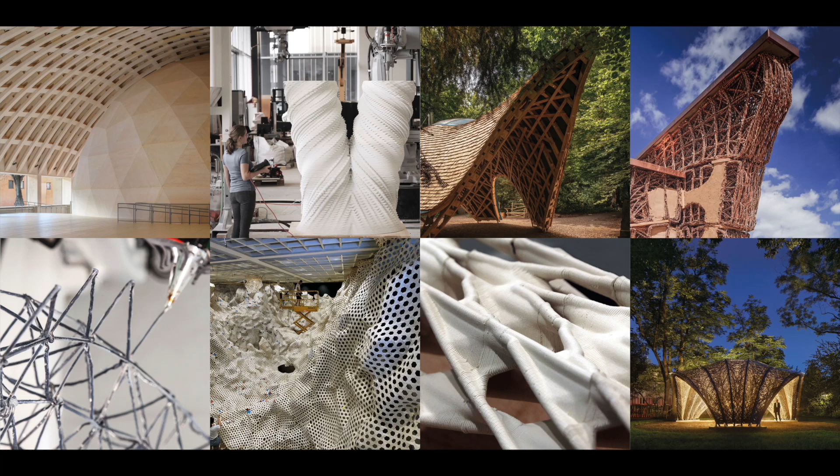Thank you. We're into the final session of a wonderful 2 days. I'll be back a bit later on, maybe to share very briefly a few thoughts on what's been a really provocative event. My job right now is simply to introduce Kathrin Dörfler, who will be leading this final session for us, and she'll be starting out with an opening statement to put it into context for all of you.

Just to put who Kathrin is into some context, there's a wonderful connection between Kathrin's career and FABRICATE, if I might borrow that kind of relationship a bit for a moment. She's an architect, researcher, and educator in computational design and robotic fabrication, and her academic career got going in the early part of the 21st century.

So in around 2004, I believe, she started at the Angewandte in Vienna, went to the Technical University, so that shift from the avant-garde to the technical in that cauldron in Central Europe of industry and arts and human endeavor. I think there's an incredibly strong culture that we can talk about in terms of where people are coming from. So there were some wonderful words today about the centers of excellence and learning that are represented in this space today. And also for those that are not here, it's incredibly important to recognize.

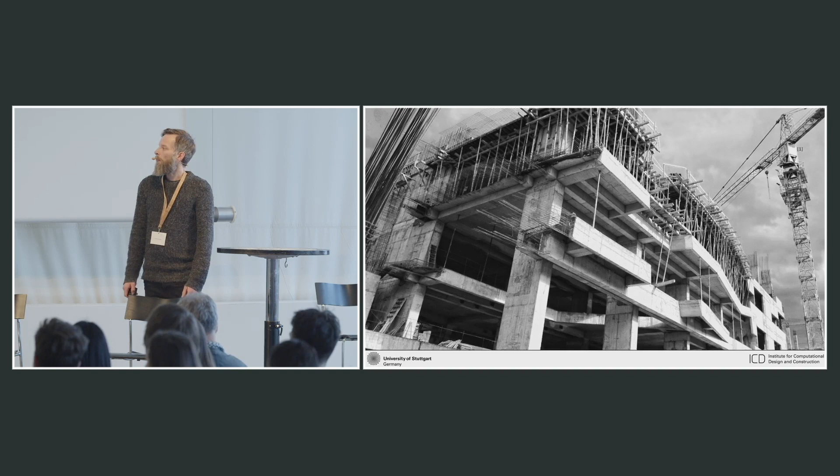It was designed by ICD and ITKE at the University of Stuttgart together with a team of ITech master students. Many of them are here today also, which I think is fantastic. And it was produced and assembled by the industry partner of the project, FibR. So before I get into the component development, I think it's good to give a bit of a background to see why we're even attempting to make building components with fibers.

So if we look at the bigger picture in the construction industry today, then we can see that there has been a lot of digital progression recently. However, the construction industry is slower to adopt this digital innovation. However, it would be important because there's a significant global requirement for additional floor space that we will have to build over the next years, and we've discussed this before also yesterday. So that's going to be a challenge to achieve and will require additional effectivity in construction. And on top of that, there is, of course, the climate crisis, to which construction is also significantly contributing with about 37% of global energy and process emissions coming from the construction sector.

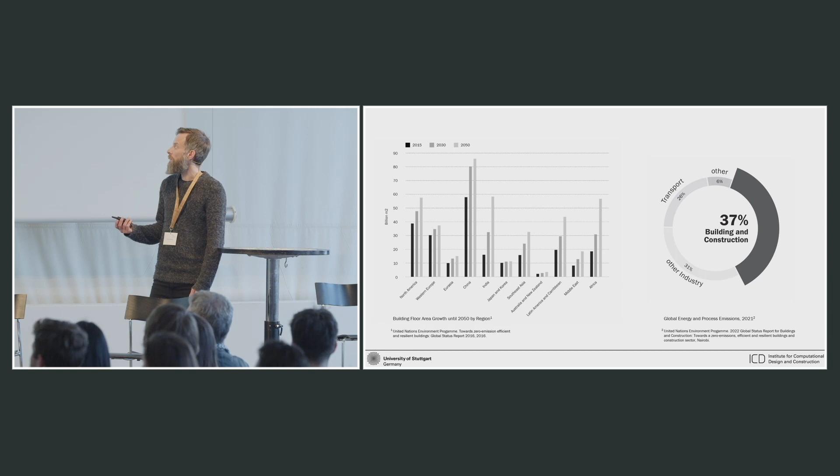So I think the question that we should ask ourselves as architects is, what can we do differently? How can we build differently? How can we be more effective and at the same time more sustainable? And for this problem, we can find a lot of inspiration in natural systems. So if we look at how nature works, then we can see that we have a very high degree of integration of form, material, and structure. And nature achieves material savings through differentiation and geometric complexity. And if we look at the current state in the construction industry, that is a very big contrast to that, because we're mostly prioritizing uniform building components to mass produce them, right?

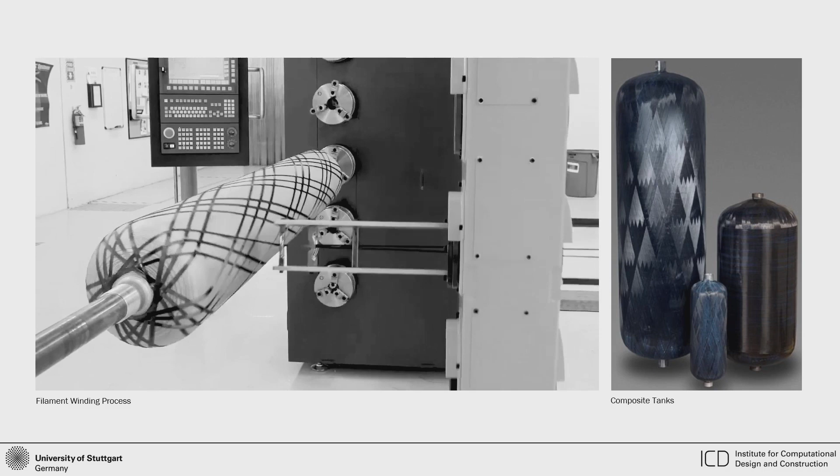And this principle of integration does not only apply to natural systems, but we can also transform that to technical fiber assemblies. And leveraging this potential is strongly tied to the way how we fabricate these assemblies. And a very interesting technique from the industry is filament winding. So basically here, resin-impregnated fibers are deposited on a mandrel in different pattern formations. And by changing this pattern, we can customize the performance, and we can tailor the material placement to our needs. And that's also very interesting for building components.

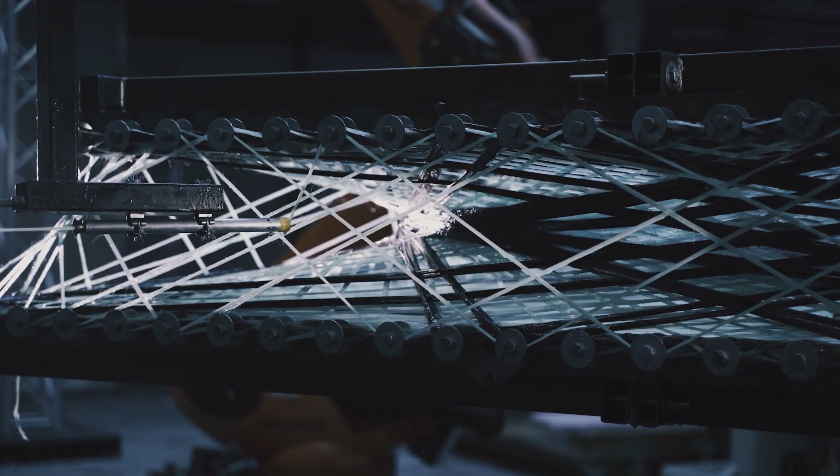And based on this principle, ICD and ITKE developed coreless filament winding throughout the last decade. So basically that enables the production of morphologically differentiated building parts with minimal formwork. Here we have resin-impregnated fibers that are deposited around anchor points on winding frames to create highly customizable and multi-layered fiber components. And the shape of the composite is established by the interaction of the fibers. And this enabled the production of a series of demonstrator projects throughout the last years. They demonstrate how we can create lightweight, highly performative composite components.

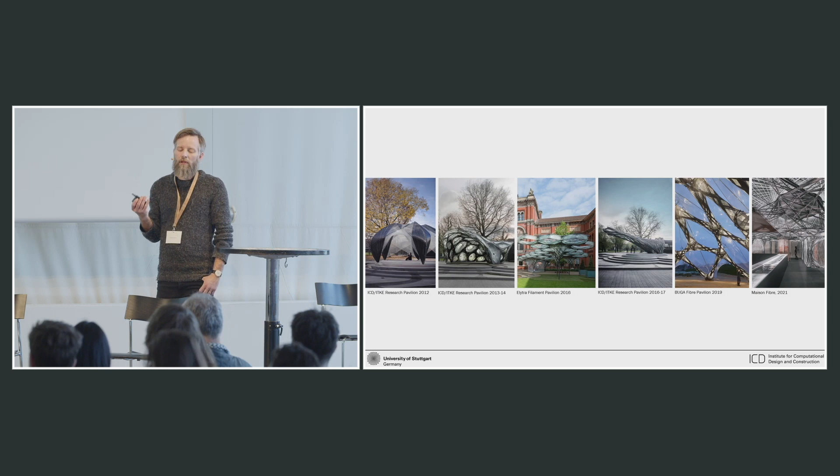However, if you look at the material system, they use carbon and glass fibers. And these materials are based on non-renewable material sources, and they have rather high global warming potential and embodied energy. But we can improve on that. We can change this material and use plant fibers instead. So if we look at flax fibers, they have high stiffness and strength values, and they can be locally grown in Central Europe, and they don't depend on non-renewable energy in the production, so they don't depend on petrochemical sources.

Yeah, that's the base material. So the raw material consists of fiber filaments, either parallel or slightly twisted, and they are impregnated with a resin matrix that acts as a binder. And these fiber bundles are anisotropic, so that means the longitudinal direction has a much higher stiffness than the transversal one. And that's an important precondition for our fiber formations, because we can leverage this fact.

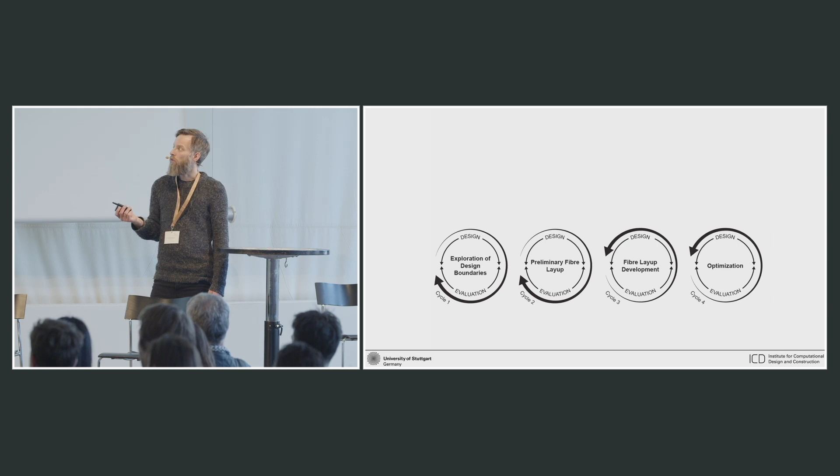So we can tailor the composite and the stiffness and the strength to the direction and the magnitude of the loads that we have in our structures. And to leverage this potential of anisotropic fiber formations, we developed a feedback-based co-design workflow that is represented as 4 iterative cycles. It relies on concurrent information exchange, and it allows for the co-evolution of computational design, structural engineering, and robotic fabrication.

And the use of plant fibers now adds additional complexities to this process, because the fibers have higher variabilities in their mechanical properties, and we need to account for that also in the design process. So basically, all those development cycles need to be extended. So the material system has a significant influence on the design boundaries. It impacts component dimensions, span, connection amount, connection type. And the characterization of the material becomes really important.

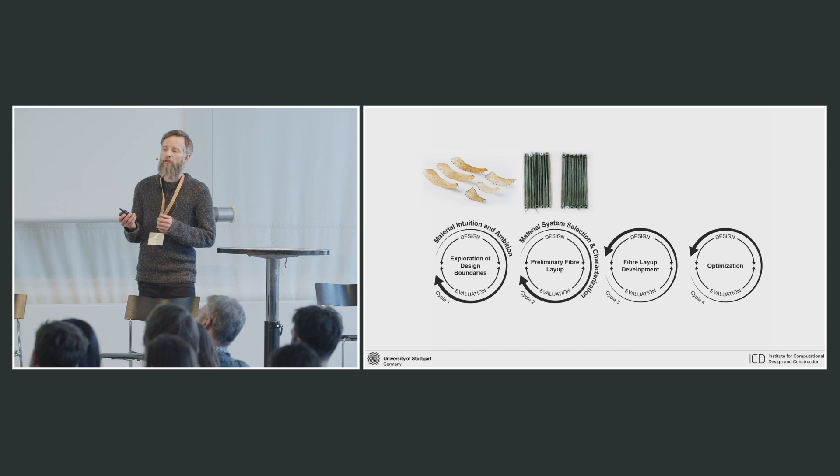So here we use small-scale specimens to determine the actual mechanical properties that we can get out of these material systems with our fabrication system. In the next step, this has to be evaluated, basically the scalability of those small-scale investigations at a full scale through full-scale prototyping, which is very important for the fiber layup development. And ultimately, we want to optimize our fiber patterns to make sure we use our material system to its maximum capacity, so we find the boundaries of this material system.

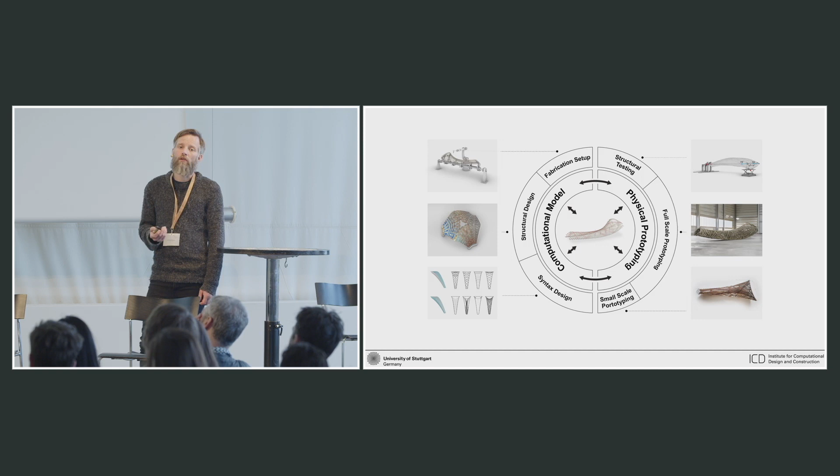Throughout the component development, our computational models are continuously informed and calibrated by real-world feedback that we derive from small-scale prototyping, full-scale prototyping, and subsequent structural testing. Especially prototyping at the full scale is important, because it gives us feedback on the manufacturing feasibility, structural integrity, and also the design quality. And the subsequent structural testing allows us to calibrate digital models and to determine safety factors for all of our fiber patterns.

The development of the component started with the exploration of the design boundaries. So here the material capacity was estimated in preliminary structural investigations and models to allow for a maximum of 5 meter span. So that led these initial investigations on the component morphologies that we can see here. And we ended up with a global design of 15 components that are radially arranged in three groups of 5 component types each.

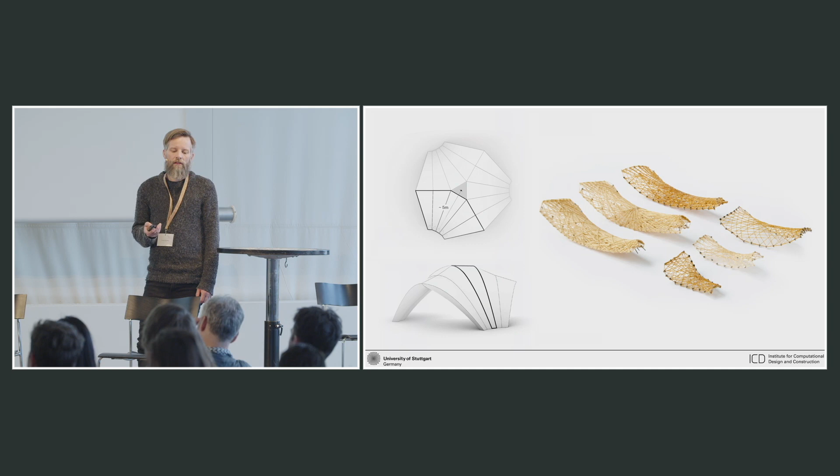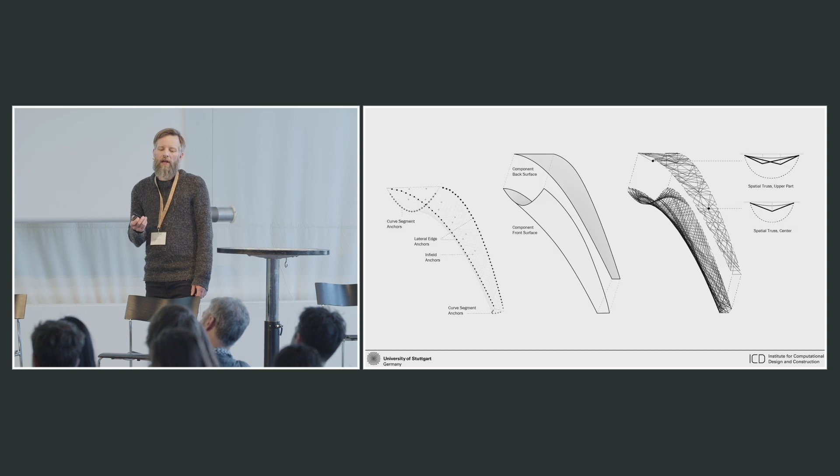And the center is closed with a triangular keystone element, and then we have a polycarbonate skin to cover the structure and to shelter the interior and also protect the natural fiber components. The final anchor point configuration looks like this. So basically we have 2 curved segments and lateral edge anchors that define the component. So the component can be divided into 2 surfaces. We have a front and a back surface. And the front surface is conceived as a lattice-like layer, and the back part of the component is composed of multiple truss-like layers, and it supports the polycarbonate skin.

Each fiber component is about 5 meters long. And here we can see the individual layers that make up the 2 surfaces. So we see the back surface that's composed of multiple truss layers and then additional bracing layers to push fibers together to improve fiber interaction. And this back part receives and distributes the snow and wind forces that act on this polycarbonate skin.

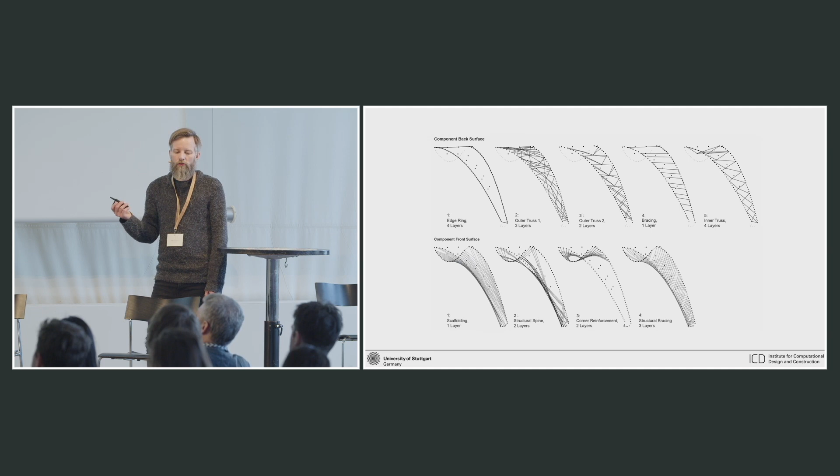And the front surface makes use of the high surface curvature that we have in this part for increased fiber interaction of these long spanning fibers. It's a combination of scaffolding with a longitudinal structural spine and additional corner reinforcement to add additional stiffness and to make sure that we reduce the buckling length. And together, those 2 surfaces form a closed hollow section, and that increases geometrical stiffness.

So to understand the material, we started material characterization based on what we knew. So we used carbon fibers and petrochemical epoxy and compared it to different flax fiber combinations. So we had flax fibers and petrochemical epoxy and flax fibers and partially bio-based epoxy. And what we saw is that the performance of the carbon fibers is, of course, the highest. With the flax fiber combinations, we reached, in compression, roughly half of that.

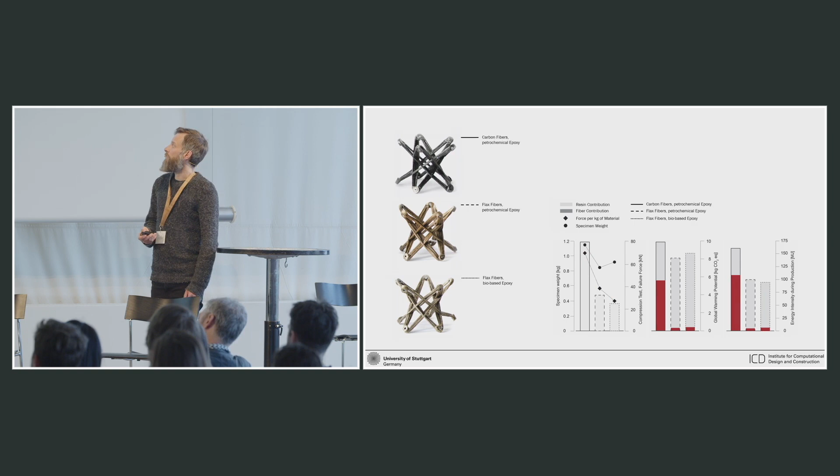And we also saw that if you look at sustainability markers like global warming potential and energy intensity, if we use plant fibers, the fiber contribution is drastically reduced. However, the resin contribution is still pretty high. We can reduce that by about 20% if we use partially bio-based epoxy. However, given the tight time frame of the project, we decided for a combination of flax fibers and conventional petrochemical epoxy. And with the material system in place, the first full-scale prototype could be built.

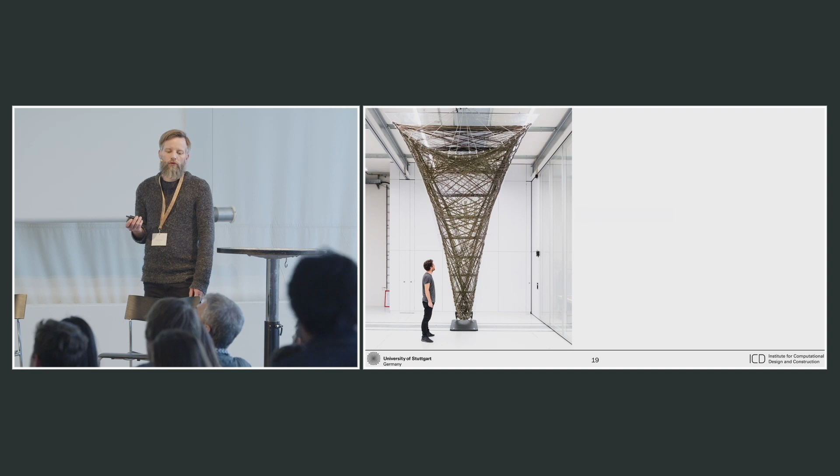This was done by the students and aimed to evaluate the scalability of the initial material characterization and the preliminary fiber layup. This was as such very successful. However, it showed inconsistent material impregnation, which was because of the fiber product. So we used a fiber roving with a small twist that was pretty hard to impregnate. So we changed that to a flat roving that was easier in terms of impregnation. Again, we had to recharacterize the material, this time using a simpler specimen, just a loop that was investigated in tension and compression. And this then showed improved impregnation, and we could continue.

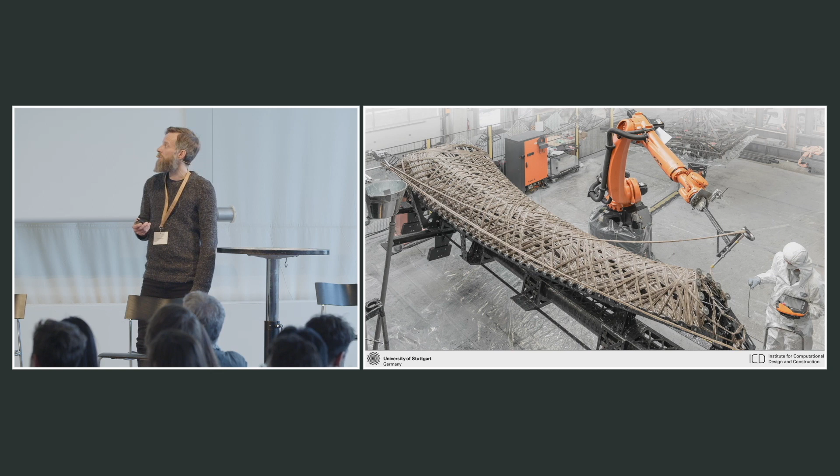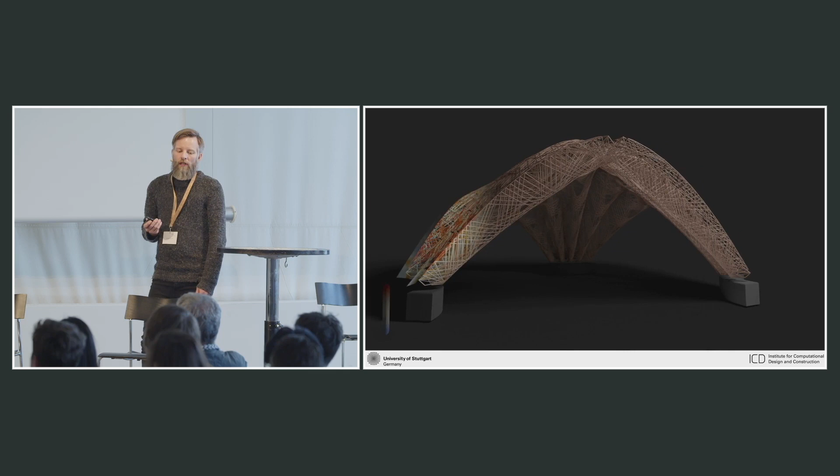So this is the actual fabrication at the industry partner's premises, where we started to produce pre-series components. In total, we made 3 of them. They were destructively tested, which is important to verify the material system at a full scale. And the FE model of this test setup is then used as a calibration tool to compare physical and digital performance. The results are then integrated into a comprehensive digital model that basically acts as a point of confluence and contains data and information from different domains like design, engineering, and manufacturing.

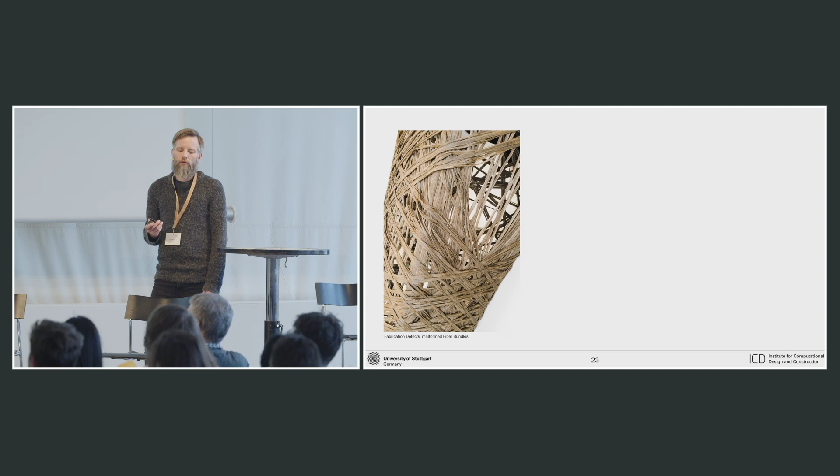And based on these pre-series components, we could identify further issues. So we again had lower than expected performance in the tests, and also fabrication issues, as you can see here, so sagging fibers that could be mitigated basically by adding a different additional material, so a sisal yarn that was embedded in the fibers to take increased tension loads during the winding.

And the lack of performance could be traced back again to impregnation issues that this time could be resolved by modifying the manufacturing equipment, so the end effector of the robot and the resin bath. And then again, we retested that, and this is a cross-section through the bundle. So here you can see that was the first iteration, and then this was the final iteration, so we have a much smoother and better impregnation.

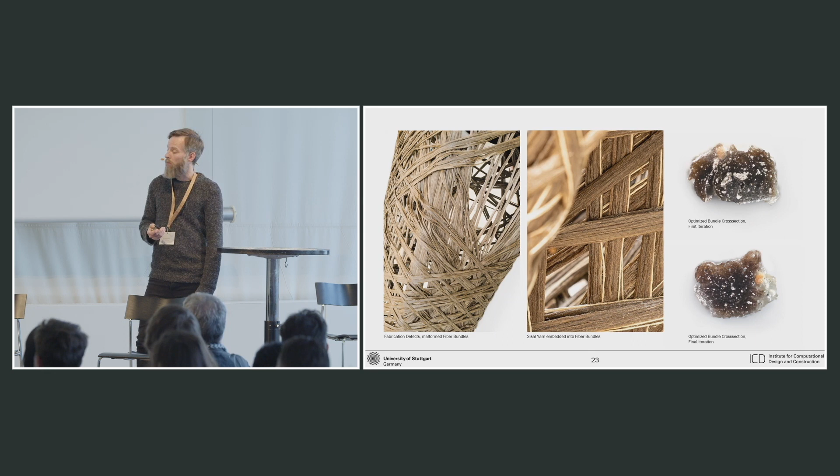With those adjustments in place, all 15 components could be successfully produced. Each of the components is about 100 kilograms. It can take compression loads of up to 40 kilonewtons. The components were then assembled. The assembly was a very fast process, so they can easily be handled by a small team with the help of a small crane. They were put in place. And that's the final result.

So the entire fiber structure is only 1.5 tons. It covers an area of 46 square meters, and it complies with the German building code and the structural requirements that go with that. That's the interior view, so we can see this kind of unique visual expression of the natural fiber composite elements.

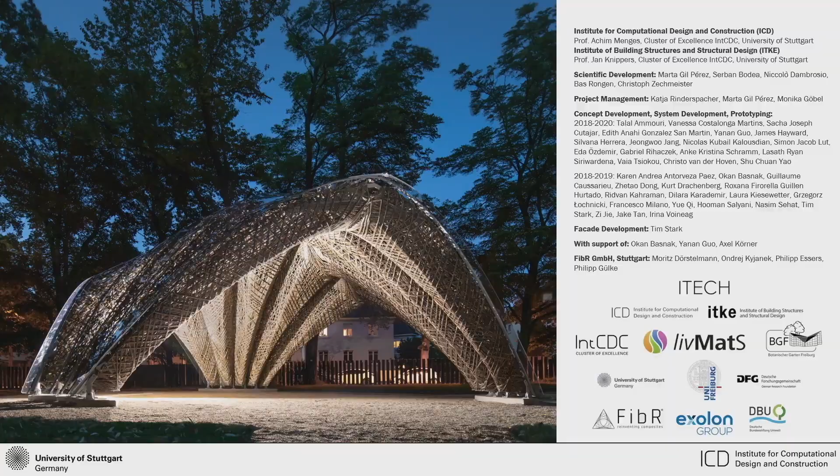Summing up, I think we saw that plant fibers can provide ecological benefits over the use of carbon and glass fiber components. However, we also saw that they add additional complexities to design, to manufacturing and evaluation, which we need to account for by flexible and interdisciplinary design workflows that allow for a material-driven development of these complex fiber patterns. And to wrap up, I want to mention two points that originated from this project that we are currently working on.

The first one is LCA indicators. So I mentioned that before. So we used the global warming potential and energy intensity to evaluate different materials, but to fully assess the component sustainability, we need to incorporate more comprehensive LCA in the design process.

And the other point is the use of the petrochemical resin, which of course was a compromise that we had to do because of the short time frame of the project. And there we are investigating both partially bio-based resin systems, but also fully bio-based resin systems to ultimately produce components that are biodegradable.

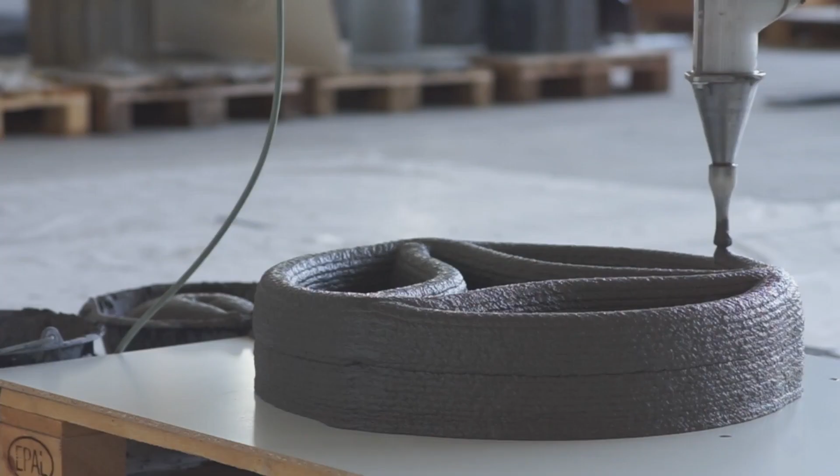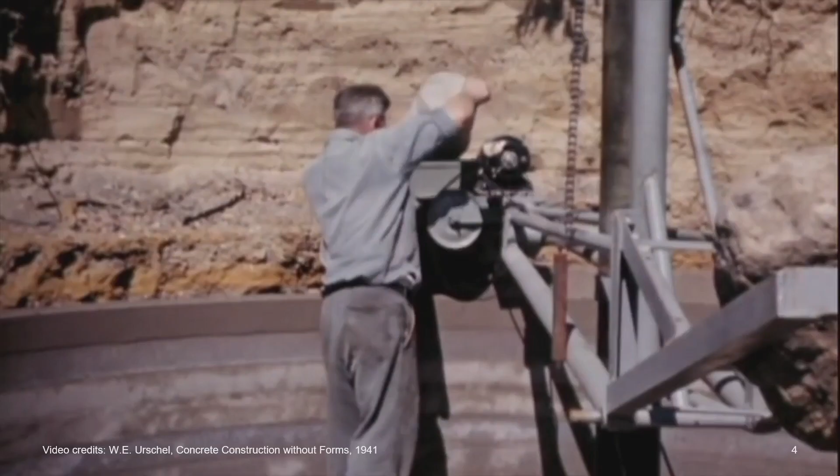Concrete is an incredibly versatile material, capable of taking any shape if poured into a formwork. The dream of building concrete structures without a formwork is not only a sustainability solution, but it is also a liberation of how we design for this material. These are the beginnings of ETH, but here are the real beginnings. Urschel patented this machine for unreinforced concrete walls in 1941. The unreinforced wall is the most direct translation of a layering process into a building component, and ironically, this remains the most common application of concrete printing in construction.

In this context, it is important to question the direction in which we steer this technology and what are the implications of digital fabrication for the construction site. And in contrast with existing architectural examples, our approach to 3D concrete printing is based on achieving structural integrity with minimal material, printing at high resolution, intricate designs, and producing components in prefabrication for modular construction with dry assembly connections.

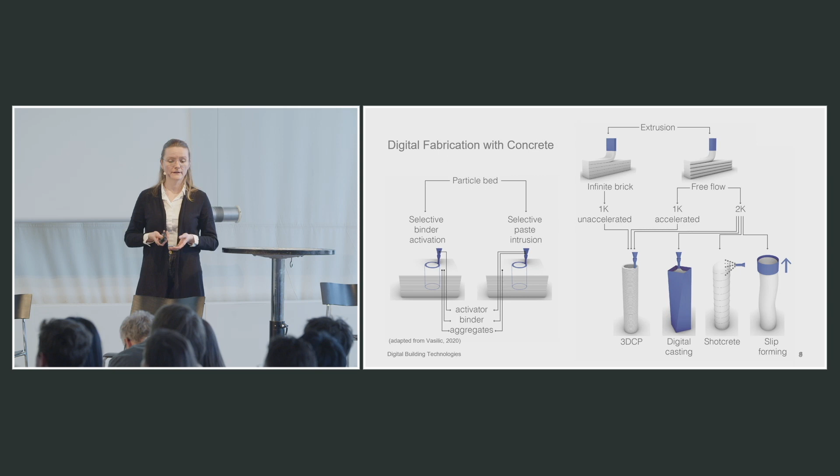This slide shows the broad scope of additive manufacturing technologies with concrete. For Tor Alva, we work with extrusion-based 3D printing, focusing on free-flow extrusion with a two-component material system. Our reinforcement strategies focus on solutions that have the most direct application in construction. We insert the main reinforcement after 3D printing, either as bonded rebar or as post-tensioning. And the scale of the secondary reinforcement is closer to that of the layer, making the two processes compatible, especially in our chosen solution of placing the shear reinforcement between the layers.

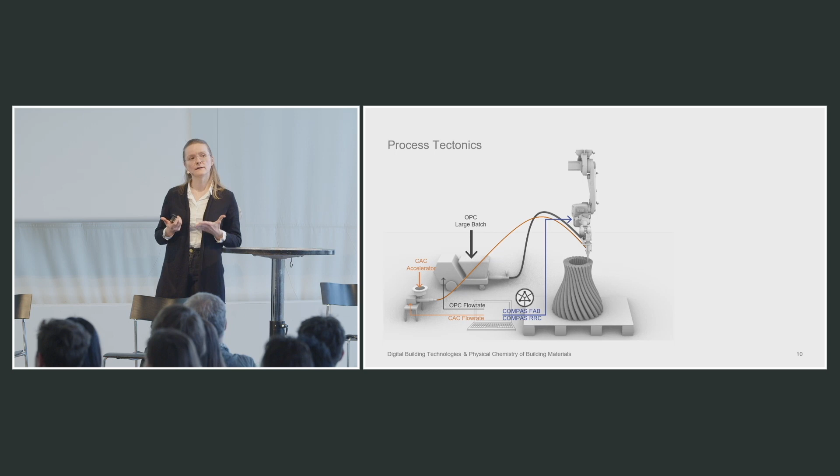The first implementation of this process is based on using a large batch of retarded Portland cement mix that is prepared in sufficient quantity for the entire print. This material is then later intermixed with the accelerator at the nozzle, and it enables a very fast vertical build-up rate, especially suited for columns.

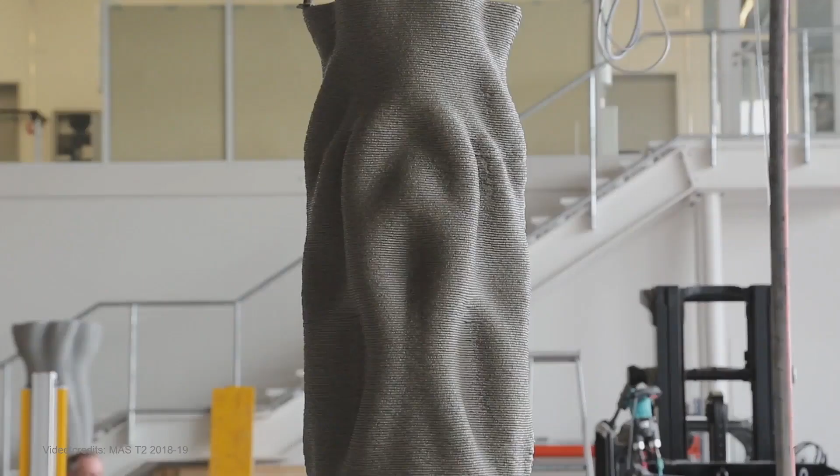This 3D printing system was tested at large scale in the first collaboration we had with Origen Foundation, where we designed and built an outdoor installation of 9 bespoke columns to set the stage for the 2019 edition of the Origen Festival of Culture. The columns share a similar typology with an outer ornamented shell and an inner vertical core. The core is reinforced with a rebar cage and cast concrete. In this round of innovation, the 3D printing was purely lost formwork.

As the collaboration with Origen Foundation expanded in scope and vision, this also led to new architectural opportunities, like the tower. This multi-story building uses the 3D printed concrete structurally and is designed to comply with the Swiss building codes. One main design requirement given by the client was that the construction should be a modular tower suitable for disassembly. Being able to produce this tower also meant adapting the fabrication setup for longer production cycles.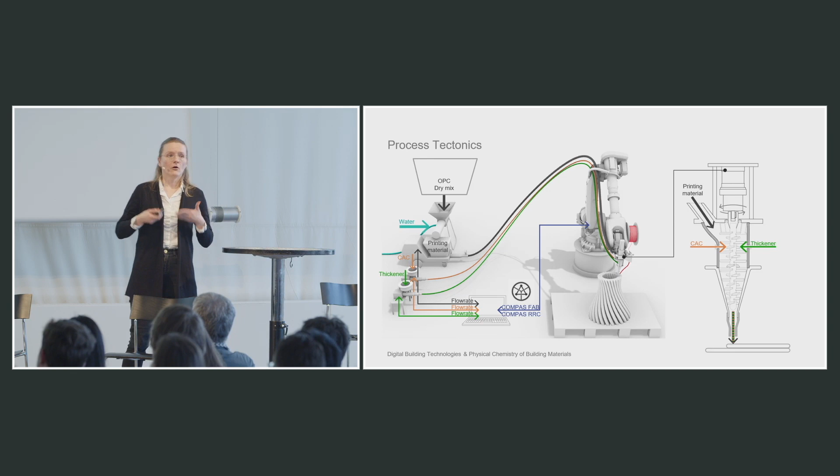We implemented a dry mixing system by preparing the material on demand, just adding water to the dry powder. Next, we also wanted a higher control of the filament properties, so we can extend the capacity of overhangs, but also really control the material-driven ornamentation.

The dry mix system was tested on the fabrication of the first demonstrator for Tor Alva, and you can see here how hollow shell elements are printed up to 2.5 meters high, and they will be assembled into a 4 meter tall structure. In this iteration, the columns are still vertical and assembled from two 3D printed components fitted with a conventional rebar cage. This time the columns are hollow.

They are transported on site and handled with regular construction equipment, where they are assembled using 4 post-tensioning rods driven through the middle of the column. For the demonstrator, the building system consists of discrete columns and slabs, where the dry connections are fitted with shear keys. Because joining 3D printed components directly is not a very aesthetic solution, we opted for treating the joint with this intermediary cast concrete to create an alternation between the components that are assembled on site. And this prototyping session helped us understand the main challenges of the project.

So we really had to think of how we can improve and go from a printed material that was not considered load-bearing to a new design. We also wanted to change the pillars from being vertical and reduce the number of post-tensioning tendons in the core. And we also wanted to have a better solution for joining the 3D printed components. The redesign introduced branching columns with a variation from 2 to 4 branches. And this V-column arrangement also increased the structural performance of the elements to resist horizontal forces better, where one of the branches acts in compression and the other one in tension.

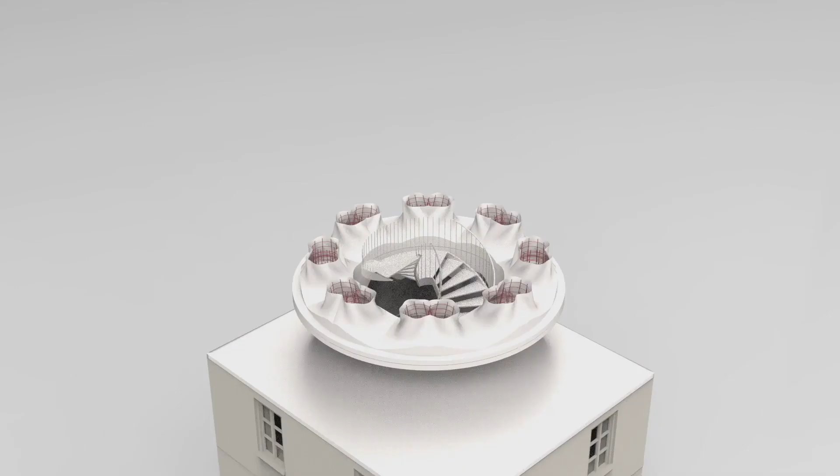As we progress, the columns gradually get slender until we reach the last level of the column under the cupola, where the performing arts space is planned. Transitioning from vertical to branching columns allowed for a rationalization of the building system into 32 self-similar components, discretized following the structural logic. The columns not only act as structural elements, but are also a central space-defining feature of the tower.

Each component is further discretized for fabrication constraints into a cast base, a Y 3D printed element of 2 meters, a continuation of the branches, and the precast capital that closes the assembly into a structurally rigid component. So far, we experienced that casting the bases poses more complexities than actually 3D printing the columns. The component is finalized after vertical rebar is placed and grouted into the hollow channels of the structure, and each branch is post-tensioned with one rod that crosses between the 2 elements. The redesign of the columns from vertical to branching also reduced the number of post-tensioning elements per branch.

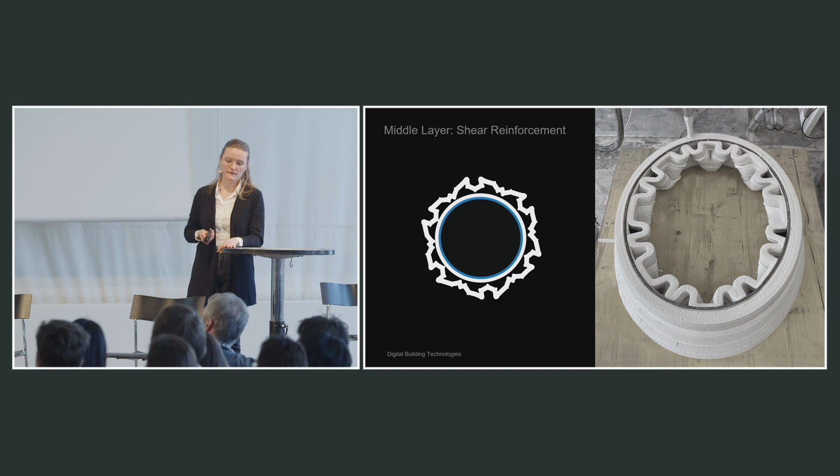Our print path rationalization is based on a 3-layer approach in which the outer layer stays visible and integrates the ornamentation. The middle layer hosts the interlayer rebar, and the inner one creates hollow channels that host the main reinforcement that is grouted within the element. Initially, we wanted to design hyperbolic cores. However, we were not able to reliably grout this intricate network of channels and make sure that the bond with the vertical rebar is ensured.

The power of procedural design for print path generation is shown at the intersection of 2 branches. Unlike entirely hollow elements, we maintain the logic of the branch into this intersection by overlapping the path. In this way, the flow of forces is not interrupted. And we are also able to solve the placing of the horizontal rebar in different layers, keeping the simple circle intact.

From a structural design perspective, placing the layers perpendicular to the main direction of the branch is ideal. However, it's not so easy from the assembly perspective. So we decided to balance the structural design with the practicability of construction and use these inclined layers only in the cupola section.

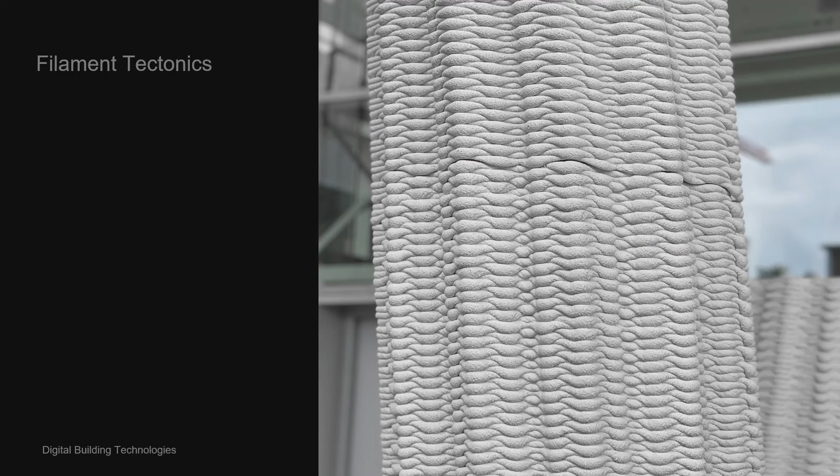We achieve a seamless visual link between individual 3D printed elements through material-driven ornamentation. This natural drip of the material during printing creates the interlocking effect that slightly hides the seam. We implement this by using as printing substrate the 5 previous layers of the components, which we separate with a thin membrane. This type of connection is not high resolution in a geometrical sense, but is inspired by how repeatable the process is.

We tested the structural concept on 2 specimens, 2-meter tall V columns. One of them was fully reinforced, the other one also had post-tensioning in addition to the reinforcement. Both columns exhibited a ductile behavior.

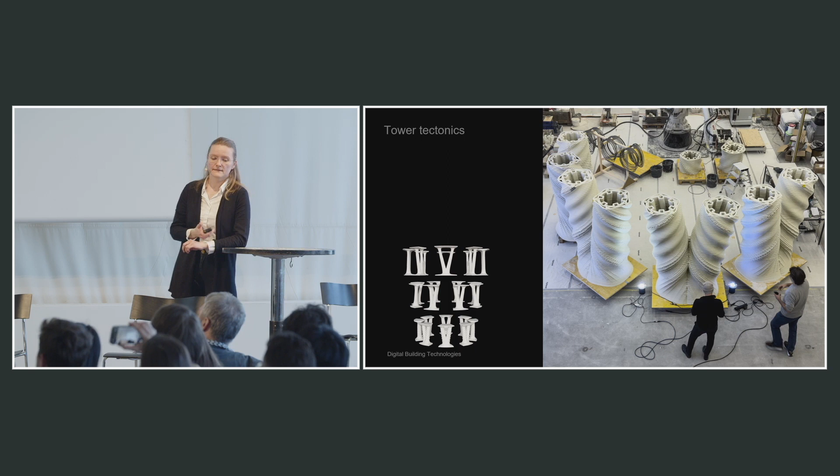And the successful tests allowed us to eliminate the post-tensioning rods in columns spanning level 1 to 3. Level 4, in which the columns measure 6 meters, will include both reinforcement and post-tensioning. And the cupola, where the columns are 3D printed with the layers normal to the main inclination, there will be no reinforcement, only the post-tensioning going to the middle of the columns.

We continued production of the elements. This is an image of the production space. We scan the elements to build a database of the projects, and the overall shape is very accurate. The only deviations occur in the material-driven ornamentation, which is, of course, on purpose. The columns are picked up with a regular crane and delivered to the prefabrication company for assembly.

I want to mention that this is a highly interdisciplinary project, and we have many partners and collaborators. And this brings me to the conclusions of my talk. The projects highlighted here exemplify points along several years of interdisciplinary research that aim to use 3D printing of concrete directly as load-bearing material. This research showcases a process that has matured from academia, and it is ready to be applied to architectural scale projects.

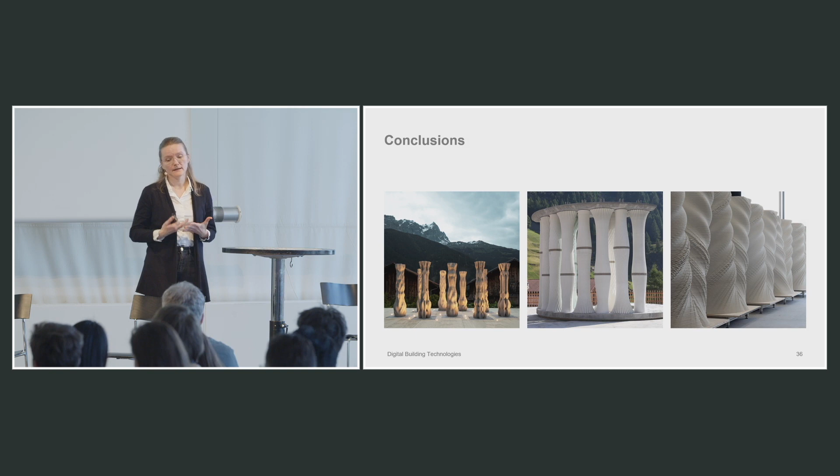However, the constructive interactions with the client should not be underestimated. The urgency to produce faster iterations without compromising design integrity, in our case, was a real catalyst for innovation. I also showed that it takes several design iterations to refine this process of designing for a new technology. What I think needs to follow is to get a better understanding of the structural behavior of the material and be more confident to use less of it overall.

Another dimension of this work really focuses on design and on the importance of design for creating new structures. It is, first of all, responsible for adding value to our society, and we should aim to design spaces that can last multiple generations. We also have a huge experience on what it takes to work with different ways of shaping concrete, and it is important to say that being able to directly 3D print concrete components is more economical than prefabricating them with conventional methods.

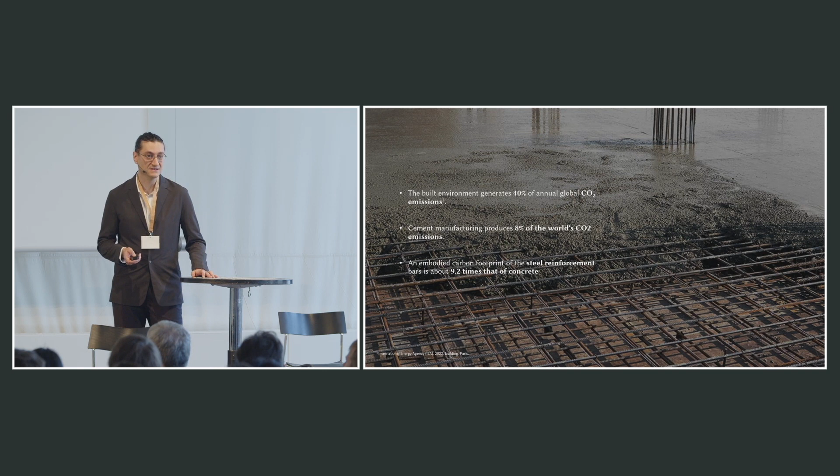And you know that the production of cement is responsible for almost 8% of the world CO2 emission. And then the embedded reinforcement, which is steel, has at least 9.2 times more embodied carbon than concrete itself. So we have to deal with this conventional reinforced concrete design. But I just wanted to bring your attention to the development that has happened in the past 60 years in the field of design of reinforced concrete, related to development of pre-tensioned, pre-stressed and post-tensioned technology in the field of concrete.

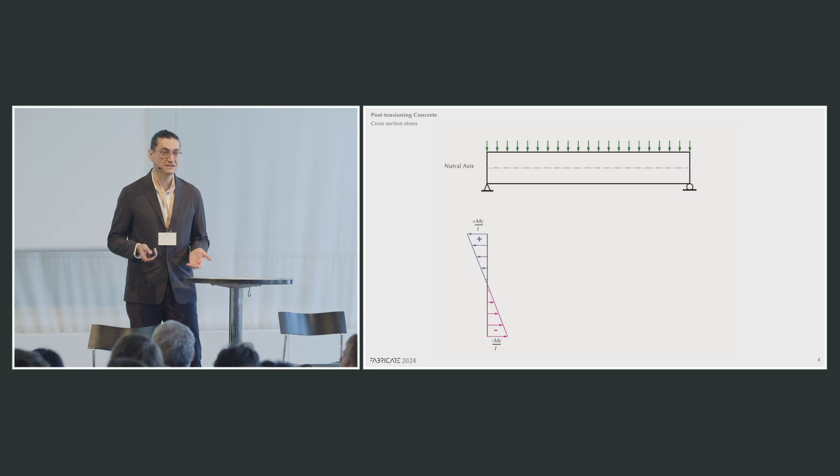So if you take a regular beam under its own self-weight, the internal stress within the beam is actually compression and tension as a result of bending moment in the system. So what happens is that if you apply loads and forces at both ends of the beam, you're changing that internal stress distribution and forcing the entire structure to act as compression dominant. And that is really key.

Similar to the arches that work as compression dominant, the post-tension system also works as compression dominant, which allows us to build longer spans with less material. And there are certain cases showing that post-tension concrete can even reduce the use of concrete by 51%. That is pretty damn efficient.

So how do we need to deal with this? How do we compete with them? How do we compete with reinforced concrete, particularly post-tension reinforced concrete? I just want to bring your attention to the point that, yes, it's an efficient system for concrete construction, but it cannot deal with some problems that we are facing for the future. And that problem is about recyclability of concrete.

The reinforcement is embedded within concrete. That makes the recycling process quite energy intensive. And also, it does not solve the problem of embodied energy as a result of construction method, because it relies on the conventional method, including all the construction waste and formwork. And also, it does not reduce the emission of concrete itself. So this is our response.

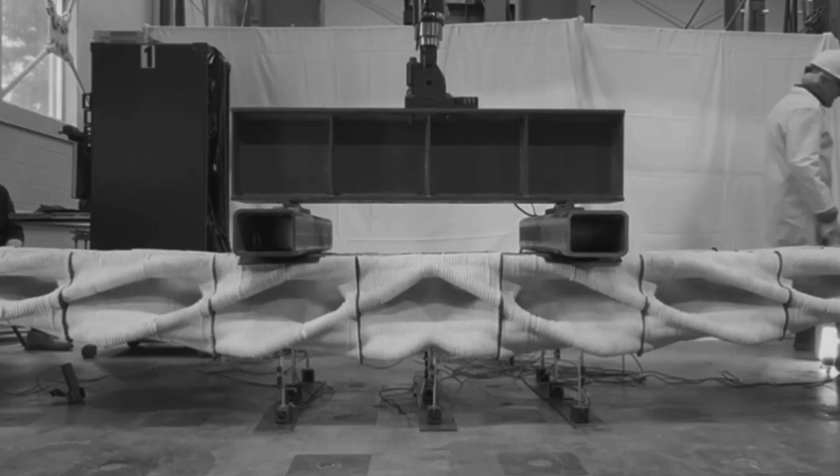So the main intention behind this research is to develop a system that has minimized reinforcement, where the reinforcement is not embedded, so you can easily take it off at the end of the life cycle, and it also has a minimized use of concrete. As you see, it actually has a very, very minimal amount of concrete in the cross-section. So how do we do this?

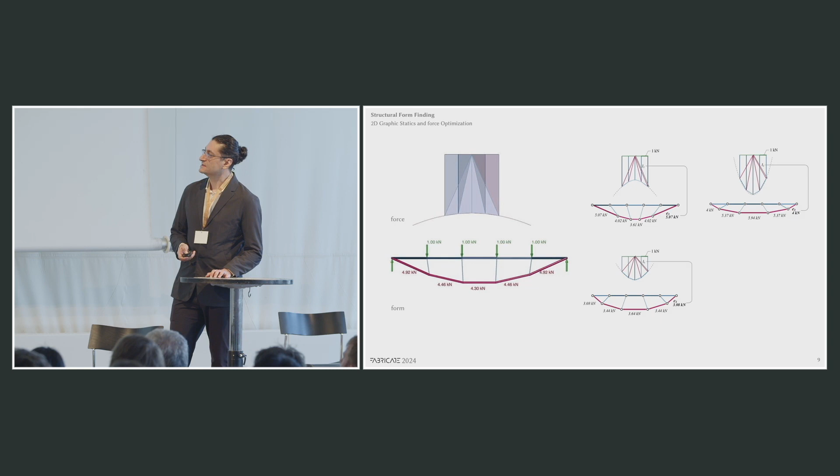We start by looking at the design of a funicular system that has both tension and compression combined. This is actually a very simple 2D graphic statics method that is covered very well in practice and research previously. The only thing that we do is develop a design that has optimized force distribution in the bottom chord, which is actually the tension. The reason for that is that we would like to have constant stress within that member. So in the later stage, we replace that with the reinforcement or the post-tensioning cable.

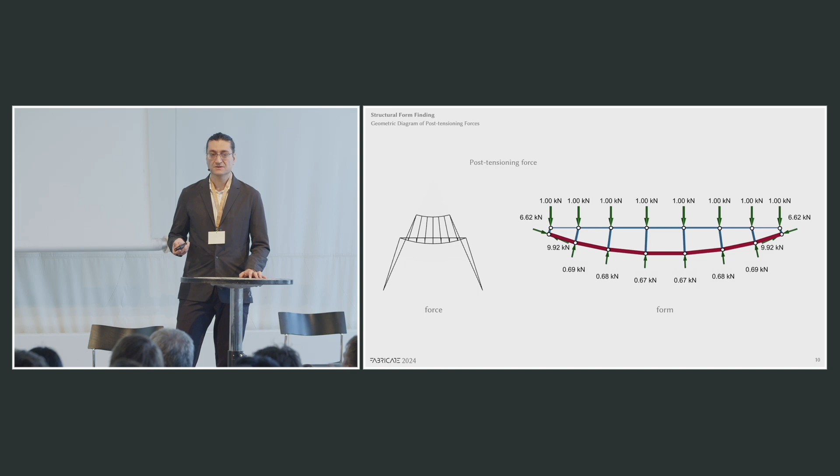In the next stage, what we do is model the effect of post-tensioning in the structure. If you remember what I showed you in the previous slide, how post-tensioning results in the entire structure going into compression only, by developing a funicular form and adding that curved post-tensioning element into the system and designing it to have constant stress, we are able to push the funicular system to act as compression dominant.

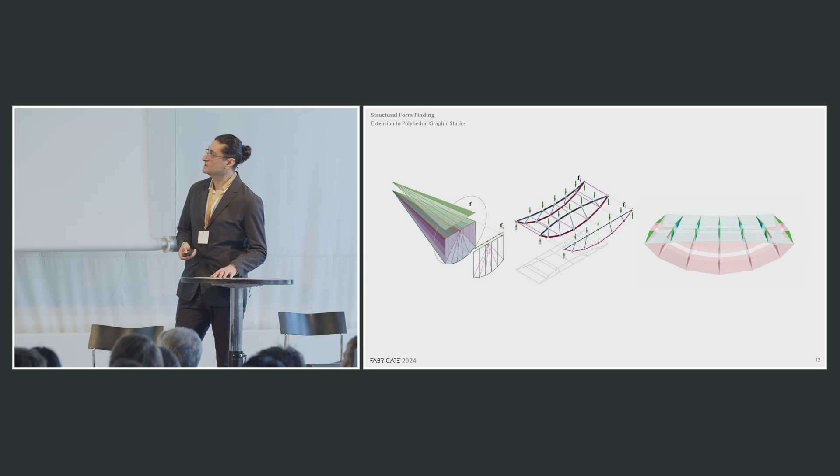So the next stage is to extend this two-dimensional simple design to 3D. For those of you who are familiar with polyhedral graphic statics, you can extrude this 2D graphic statics to a point to get three-dimensional force distribution. And you can visualize that force distribution by combining the form and force diagrams in a Minkowski operation to see the stress constant design. Again, you have control over these three-dimensional curves, the amount of control force and the depth of your structure.

But for those of you who are familiar with funicular design, you know that these structures are designed for a particular loading scenario. That means that if your loading scenario changes during the lifetime of the structure, you may need to take some action in the geometric design to add to the stiffness of the system to take asymmetric loadings or unpredicted loading during the life cycle.

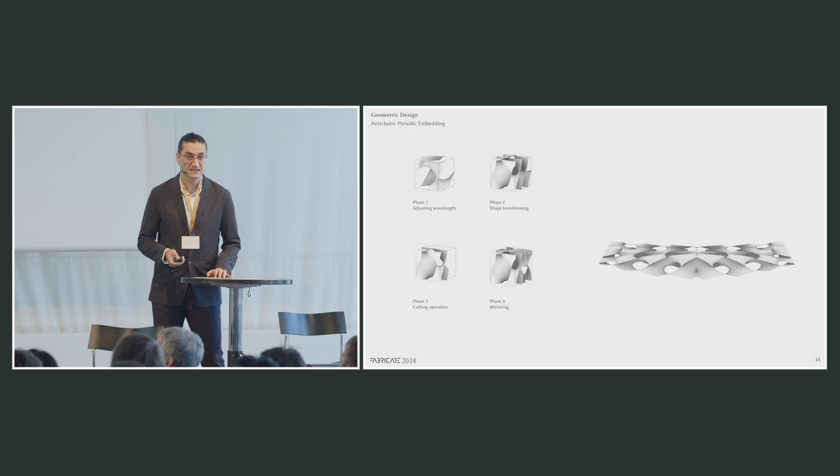So what we do here is take advantage of three-dimensional minimal surfaces and embed those three-dimensional minimal surfaces into the system, as you see. We contort those minimal surfaces to gain additional geometric stiffness for the system. But that's not as easy as you think, because production of this would require dealing with fabrication challenges. These areas that you see are quite problematic for 3D printing purposes.

So what we do is, before we get into the optimization level, we do a search to see what would be the best type, or at least the type that has the minimal amount of overhangs to be dealt with. We run a search over a variety of different families of triply periodic minimal surfaces, and then we ended up with a diamond surface. For those of you who are wondering where the name is coming from, Diamante is actually the Italian name for diamond.

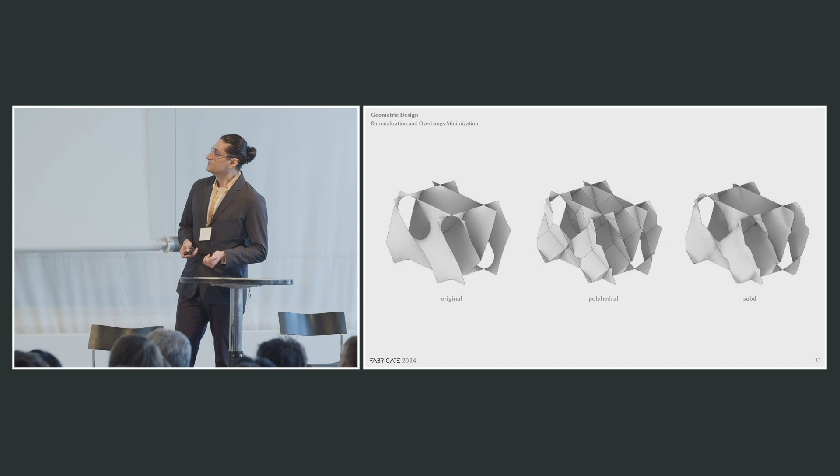So we take another major step. We average normals of these triply periodic minimal surfaces. We turn it into polyhedral surfaces because that gives us more control over the geometry and the curvature. And then we go from there and smoothen it and optimize it for overhang and the 3D printing process.

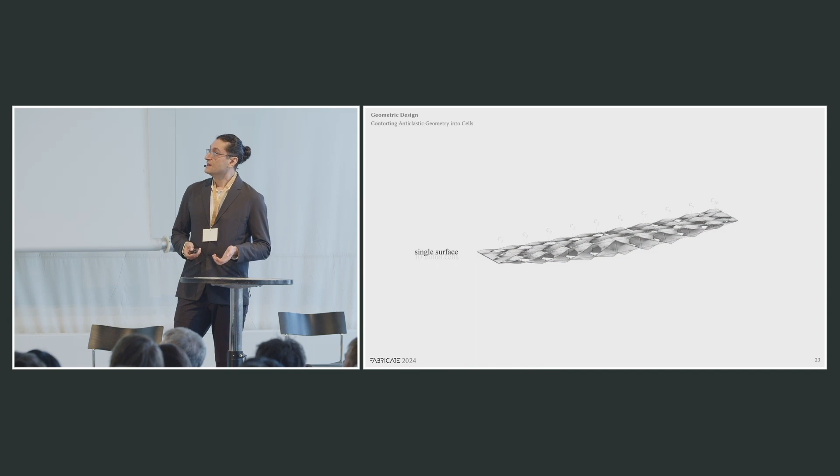So if you integrate all this system into a parametric model, you would end up with a boundary condition, the design load, funicular form finding, embedding your triply anticlastic surfaces, adding volumetric geometry to this, and then embedding your reinforcement, which is, again, not grouted. This is just basically reinforcement that goes through the conduit, and you can take it off after the life cycle. And you cut the geometry based on particular angles.

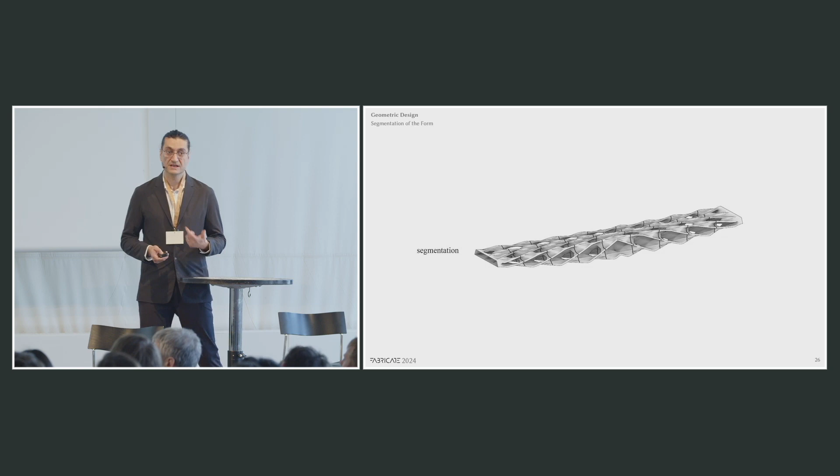So the next step is toolpath and optimization. Right now, we just did the geometric design. So there are multiple stages for that. First of all, the stop and starting planes for 3D printing are not always parallel. In fact, we try as much as possible to create a flat arch to improve the shear capacity of the system. So as a result, we ended up with certain cases where you would have local and global failure during the printing, and that depends on the angles by which you're cutting your structure. So that had to be optimized, and this is what we did.

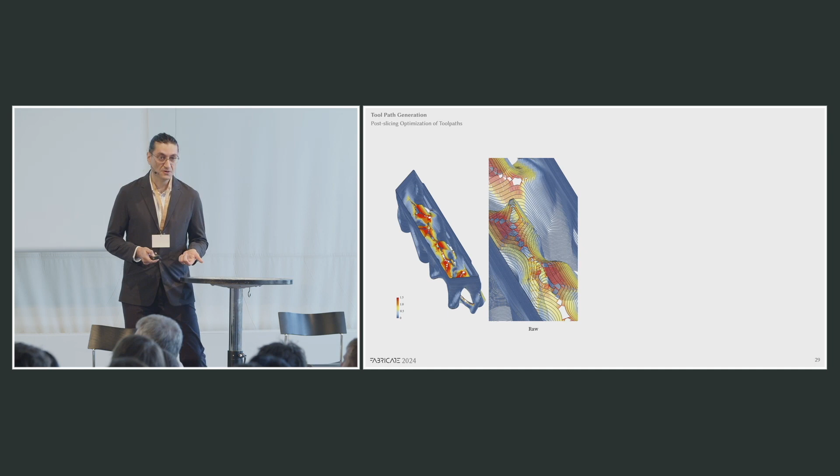In the next step, we went through the geometry, which is basically optimized at a global level, and looked at the local areas and optimized the location of the toolpath. And for your information, the geometries that we're dealing with are not possible to print using continuous printing. So we had to start and stop the print because the cross-sections are different for these spatial anticlastic geometries.

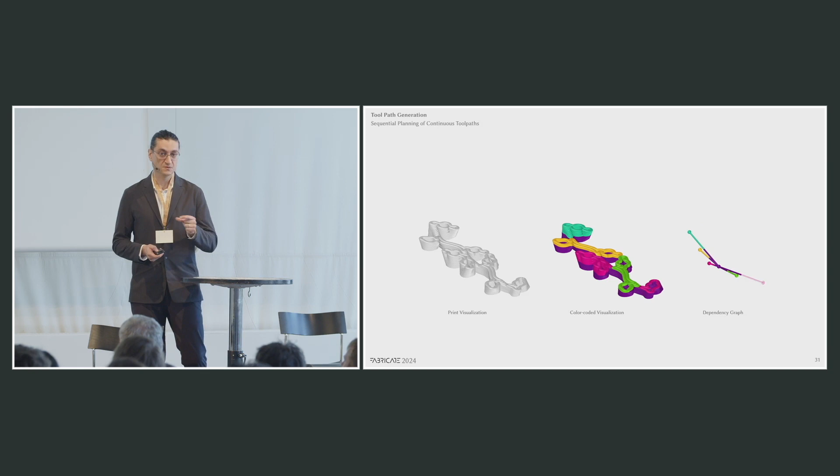So what we do is develop this graph that represents the relationship between groups of elements within that system. And then further down, we subdivide that graph, which represents the constraints of the machine and proximity of the groups, to be able to continuously print all these elements. So as a result, you end up with a diagram like this that allows you to complete the structure sequentially, to finish that complexity with a minimum amount of material. As you see, it's just one layer of concrete, but this has been distributed in three dimensions to give geometric stiffness to the system.

So we have to work with a material whose properties are unknown. Obviously, we do a lot of research in that field, and we work with our collaborators to do the load testing, compressive behavior, tensile behavior, deriving the modulus of elasticity for the material from the tests, and then use discrete finite element models with contact areas to understand how these systems would work and behave, and do physical testing to validate that, in order to develop a meaningful model that represents the result of the work at larger scale.

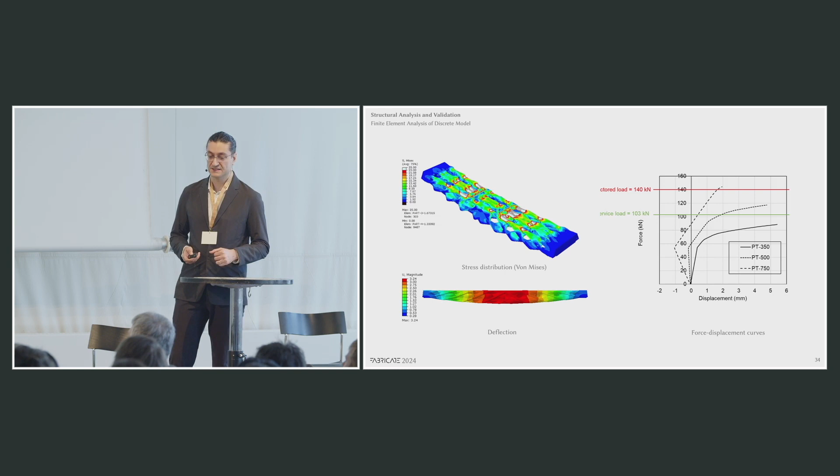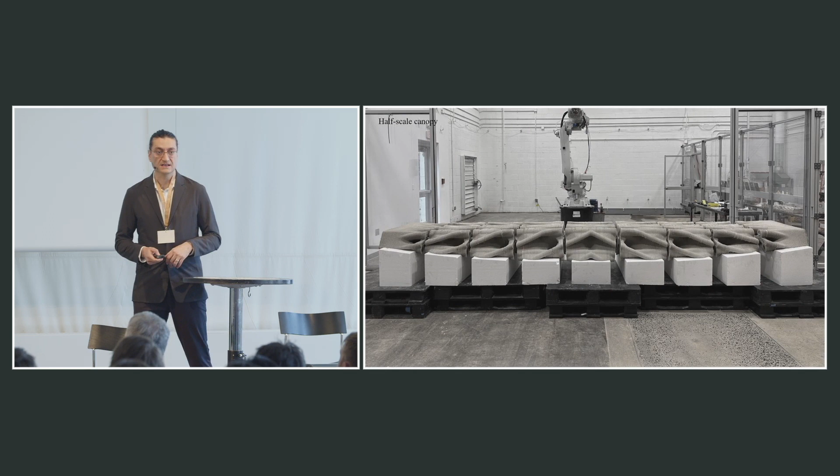Then we moved on to half scale, which, for your information, is actually a 5 meter span for the actual structure. So these are some of the results. Again, to control the precision, and since this was the first time we were doing it, we used foam to make sure all the pieces were aligned well, and we did not have the capability to flip this because of the limitation of the lab.

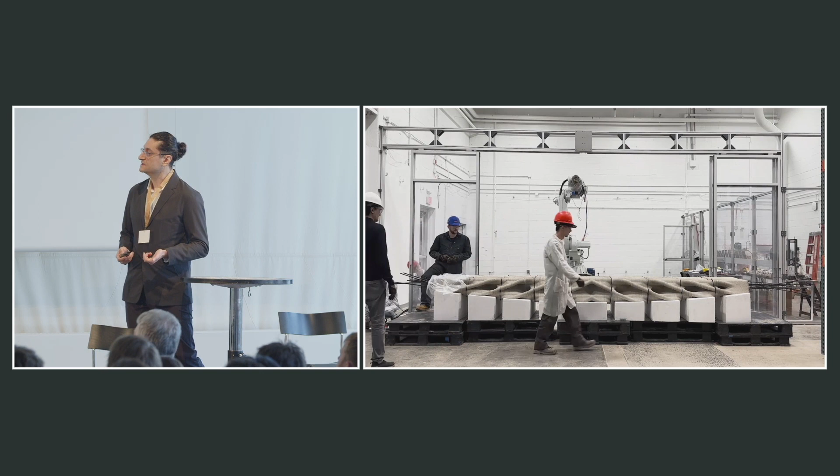And as you see, the segments are aligned with each other. The cable goes through everything. It's not grouted again, so you can actually take it off. This is the scene where the research team is post-tensioning the structure, just for your information. And for those of you familiar with post-tensioning, in common practice they usually post-tension the entire structure, or every strand or cable, to 1500 megapascal.

Here, we only post-tension it to 350, so it's not a lot of post-tensioning. It does not impose a lot of danger in terms of explosion. And this is the self-supporting structure. Some of the close-up details: we use neoprene between the elements to, again, prevent local stress concentration as a result of post-tensioning.

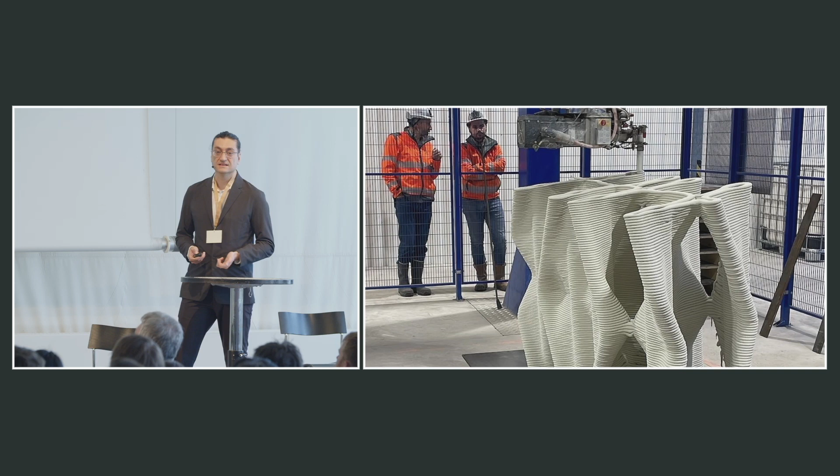Some shots. We did a preliminary test. This is 1,000 kilograms on the structure. And currently we're running a more extensive, rigorous load testing, a 2-point bending test for half scale. The next stage, thanks to our collaborator, Sika Group Switzerland, we're moving actually to 1-to-1 scale. So they're printing these prototypes in this scale, as you see. That's actually the human scale, the size of the components.

And again, the entire argument is how we can actually minimize the use of concrete. It looks bulky, but in fact, if you look at the cross-section, it's actually very minimal, right? So some of the images of the cross-section of concrete that has been folded in 3 dimensions to gain stiffness, and some treatment afterwards to get them prepared.

So what do we propose? We are proposing to build this structure in a composite configuration. So here, a wooden base is used to support the concrete beam, which is quite ironic because you've always seen 3D printed concrete supporting wood, but the concrete is actually super lightweight and can be supported by CLT.

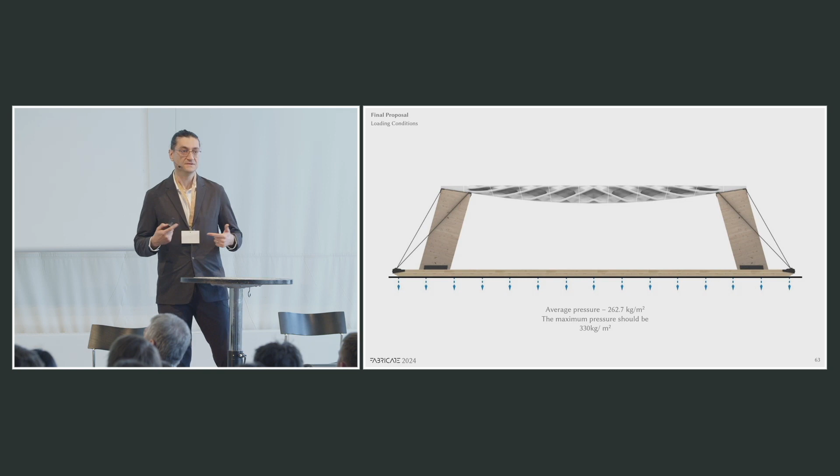And we had other constraints for the site. So this is actually showing the full scale concrete that spans 12 meters, but the limitation of the site was that we could not exert a lot of force on the soil, and we had to distribute the self-weight of the structure using a slightly ductile material such as CLT. This is the reason that we also went for CLT, and it also shows how this type of technology in the future could be mixed with carbon negative material to gain carbon neutrality, right?

So some of the details of the final production. This is hopefully happening in May 2025 in Venice. And to just summarize the project impact, we reduce the concrete volume. We take advantage of the advances of the concrete industry, which is post-tensioning. We mixed it with a design that could actually minimize the use of concrete. We address the recyclability issue, which is the main thing about the embedded reinforcement within the concrete.

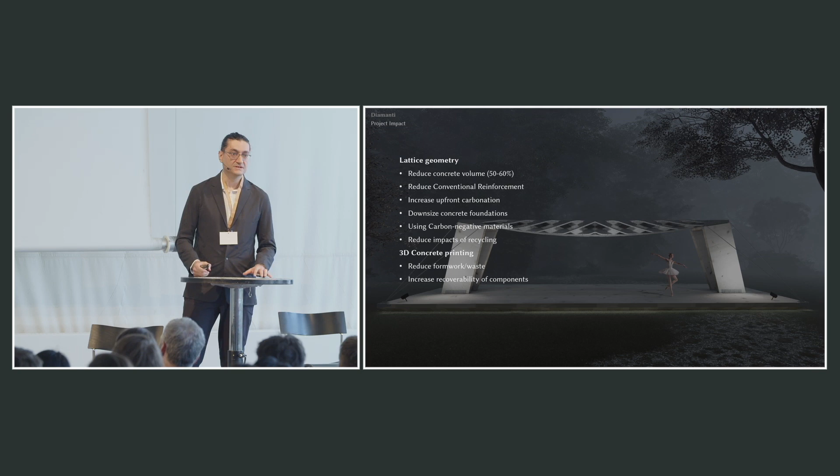The surface area of three-dimensional anticlastic geometry could be taken advantage of if we work with material scientists, which we currently do, to use a recipe that can absorb carbon. That would also be beneficial, so we could actually maximize the reduction. And obviously 3D printing concrete is an efficient way because it does not involve a lot of waste. You can replace these elements quite easily, and it's quite efficient compared to conventional systems. So with that, I think I'll stop.

Thank you, Masoud. Thank you very much. And we now move back to timber. I welcome Fabian Scheurer and Moritz Niebler. Both of you are presenting the WISDOME timber grid shell, which is flat packed and bent on site.

And Fabian, we are almost colleagues now in Munich. You recently started across the street, at the Hochschule Munich, and both of you are part of Design to Production, a well-known company, also part of the FABRICATE community. So we're really keen on hearing about this project in Stockholm. Thank you. Yep.

Hello everyone, it's a pleasure to be here again. This is our 5th FABRICATE and we're really proud that we didn't miss any of those. We'll be presenting a real-life project, applied science if you like. My colleague Moritz basically was the one who did it. I'm just presenting the view of the architects who can't be here today. So Johan Oscarson and Jonas Elding send greetings, but they couldn't come from Stockholm to be on stage with us tonight.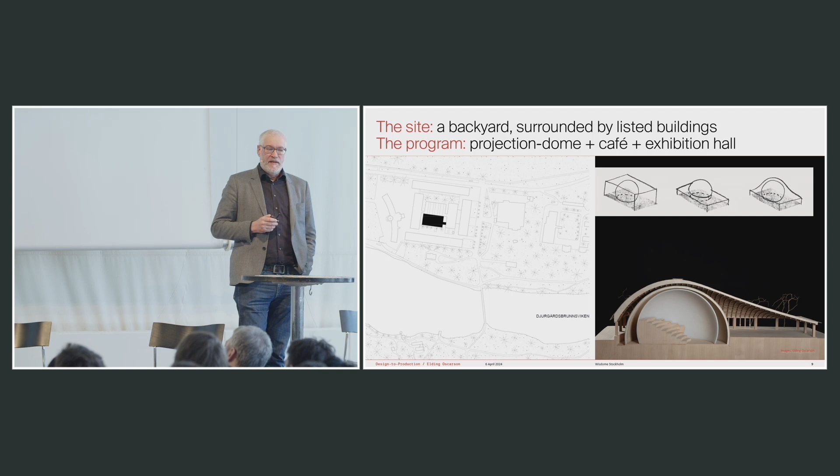But one big prerequisite of the project was the financing: this extension to the museum was sponsored by Stora Enso, a big producer of timber products in Scandinavia, which meant that their materials had to be used, because they wanted to sponsor the material, not the money. So basically on the menu are LVL on the left-hand side and CLT panels. So either very thin layers of timber glued together or thicker layers of timber glued together. And that proved to be more difficult than it seemed in the first place.

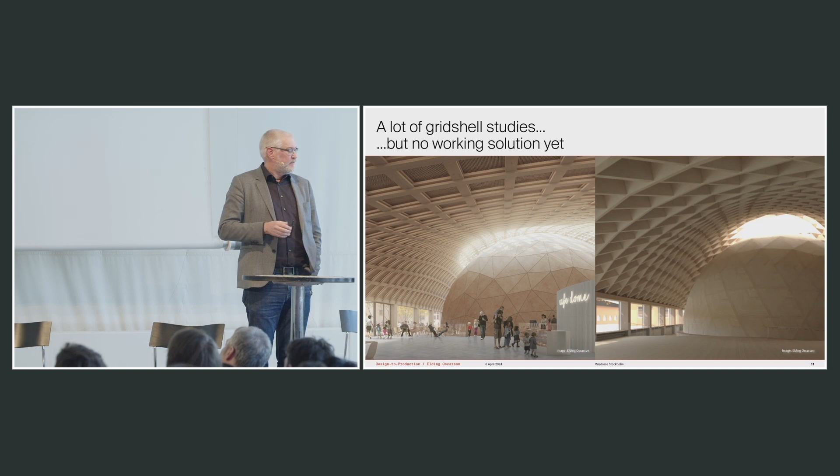So the pandemic came in also, and in 2020 the project got stuck at a point where they couldn't solve it. And they had developed also a plan B by twisting the cross-section of the beams 90 degrees, that you can see on the right-hand side, but still it didn't really go forward. And then Moritz is taking over.

Yeah, and then in 2021, Elding Oscarsson picked up again and wanted to push the project further. They didn't know actually how to go further, and they basically just asked good old Google: timber grid-shell. And a few projects turned up. For example, the Centre Pompidou in Metz, the Ninebridge Golf Club in Jeju, the mosque in Cambridge, and the Swatch headquarters in Biel.

And along these projects, names popped up. So they just called the first name popping up, which was Blumer Lehmann from Switzerland, a timber contractor. And they had just finished the Swatch headquarters like 1.5 years before. And Blumer Lehmann called their partners, which is Creation Holz Timber Engineers and SJB. Behind Creation Holz is Hermann Blumer, some maybe know, quite an old, well-known timber engineer.

And they also called us and brought the whole team, which had quite some experience in all these projects you see in the back, which they did together over the last 15 years, to the table. And now there was quite some timber knowledge and grid-shell knowledge around the table, but there was a problem, because all of these past projects were made from glue-lam timber. So small pieces, lamellas of wood glued together into a blank and then milled out on a large-scale CNC machine. But GLT, or glue-lam, was this time not really on the menu, as Fabian said.

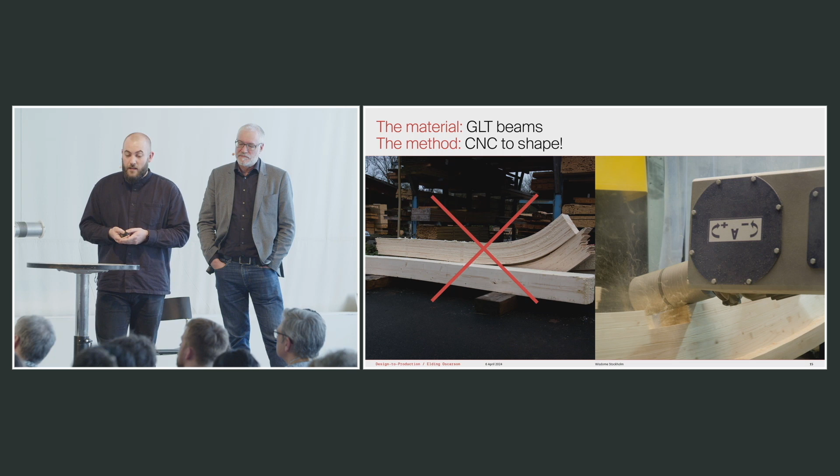So also this process would not have been in the budget and in the time frame, because it's quite a labor-intense, time-intense, and also expensive process to do. So, no glulam, so the challenge was up.

How do we build a shallow 1,200 square meter roof grid-shell structure with LVL lamellas bent on site without glue? I mean, it's half true only, because LVL itself contains quite a bit of glue, but the lamellas in between are not glued together, just held together by mechanical shear dowels and screws and threaded rods.

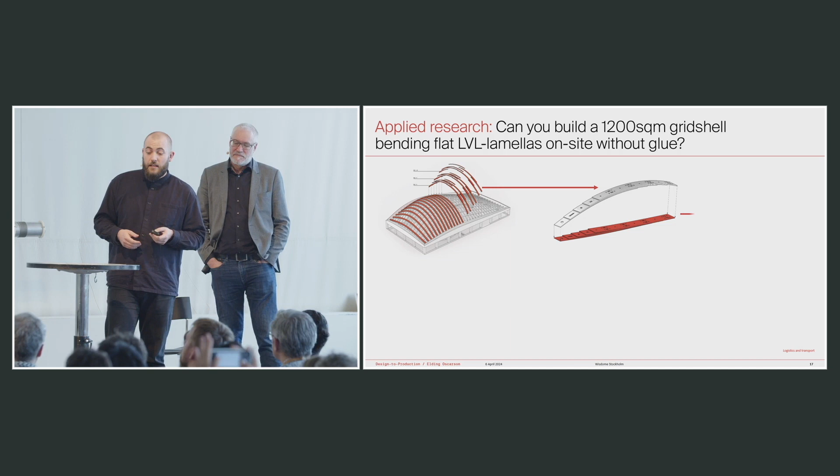So the process of what was needed for this applied research project was that the whole thing needed to be planned in 3D with every little screw, and it had to be unrolled into the flat, because it needed to be milled out of flat sheet material with all the details. Then it got nested into standard LVL sheet material, milled, packed together and shipped on site. And then they were craned into place and bent in, fixing them with just dowels and screws, basically.

So as I mentioned before, none of the team members really had experience with it. So it was pretty quickly clear they needed to get some insights, and it was decided we're going to have to build some demonstrators, some mock-ups. The first two mock-ups were built very quickly in the beginning of the project: a technical mock-up, to test does the material bend, does it go around the curve, and does it keep the shape? And also a design mock-up, how does it look?

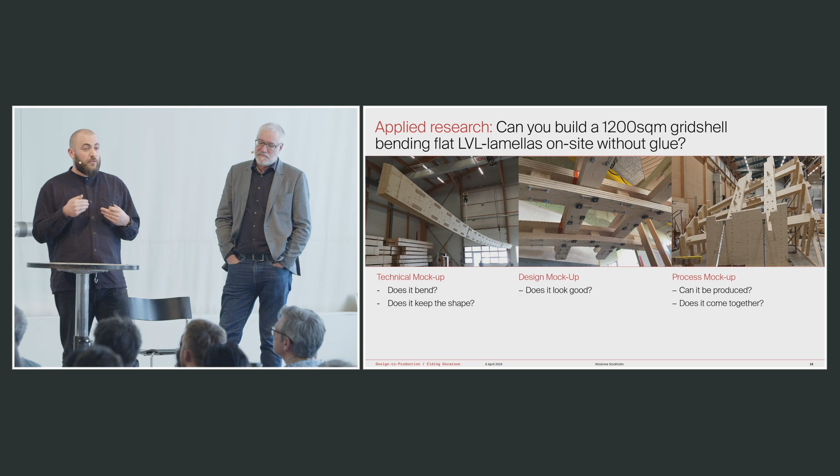And the results were not super encouraging, because there were quite some setbacks and it became clear there's quite a challenge. But nevertheless, the team said, okay, let's push this project. And after it was finally contracted, a third mock-up was done, the process mock-up, where after further development of the detailing and the construction system, everything was tested, also the production chain and the manufacturing with subcontractors, to bring the whole supply chain on board already and test this whole process, and of course if it comes together at the end.

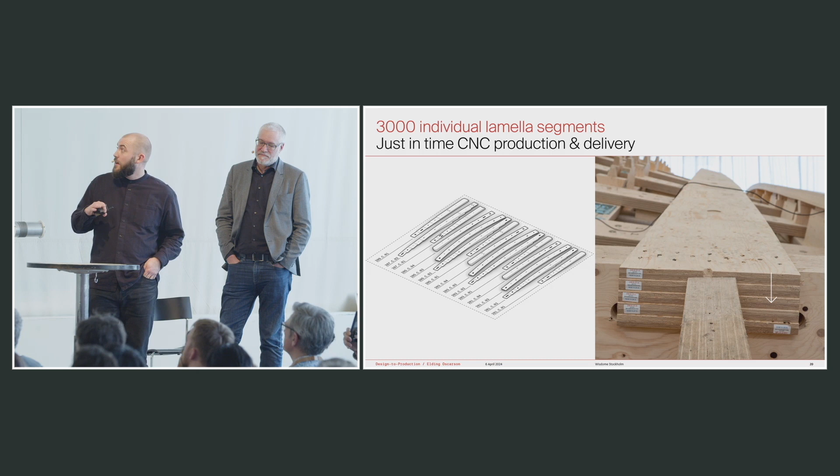So at the end, as Fabian already mentioned at the beginning, we have 5 beam layers where the lowest is laminated classically, and also acts as a kind of falsework for the rest of the timber segments bent on top. These roughly 3,000 individual lamellas were produced just in time, packed on stacks, and shipped to Sweden. And they were held together by roughly 3,500 wooden dowels, rationalized to 3 cross dowel types and 8 shear dowel types.

And at the end, it worked. The installation went smoothly, with no bigger necessity for a chainsaw. And the topping out party was roughly a year before the Swedish king opened the project. Just in time, yeah.

So basically, it was something completely new to us to build a timber grid shell not from CNC milled stiff beam parts. But on the other hand, the process that has been developed over the past 15 years with the whole team, including the engineers and the fabricator, worked the same way again. And there's a few important things pushing this forward. One is architecture as a process over time, and in this case, it was a pretty high-speed project.

We had altogether a little bit less than 5 years between the competition and the Swedish king at the end. But in the middle, there were just 13 months of planning, production, and installation, preceded by about 3 months of research. So altogether, after getting to know each other for a couple of weeks, the whole thing was done in 20 months. That means it starts with really blurry concepts in the beginning, and it has to end with crisp, sharp and ultra-precise fabrication data for all those 3,000 parts that need to come together.

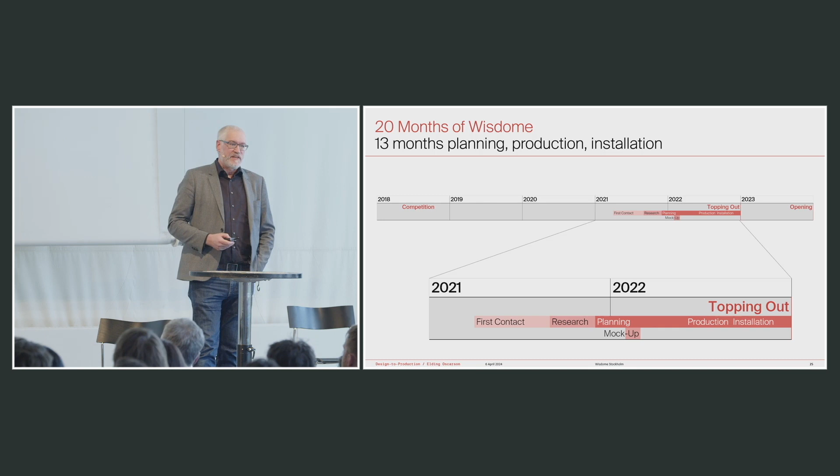And if you look at building projects, typically, this is what happens. You have the knowledge of the project rising over time, but you throw away all the digital information after every stage, because someone says, hey, let's build a new model. At the latest at the transition from the tender stage to the execution stage, the contractor typically looks at the models he's getting from the design, dumps them, and starts to rebuild his own fabrication models due to them not being precise enough, not trustworthy enough, or other things. And exactly the same thing happened here again. We had to restart things after the design stage.

The other interesting part, and that's sort of why I'm so happy to see this pre-stressed 3D printed concrete now, or post-tension 3D printed components now, is that architecture from our point of view is made from parts. So doing homogeneous things on site is sort of contrary to what we want to do, which is getting complexity away from the building site and making things in the workshop as precise as possible.

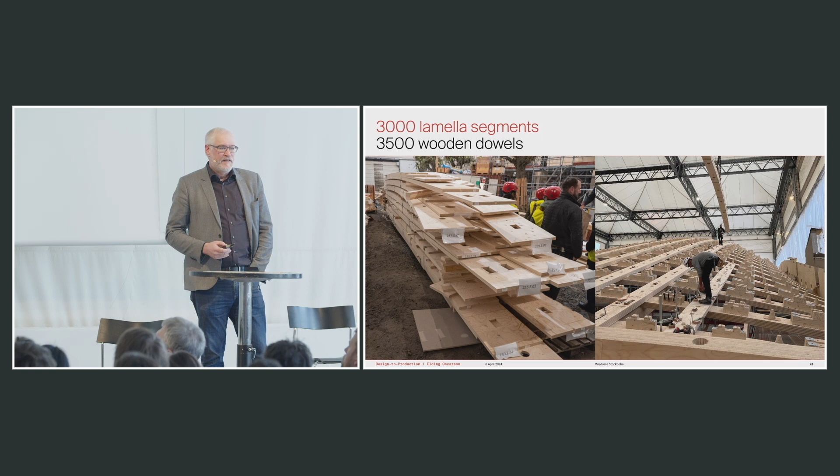So in this case, we had about 3,000 lamella segments, and we had about 3,500 wooden dowels that had to be milled precisely on CNC machines. And of course, what you have is basically an explosion of information somewhere in the process. You start with simple design models, and somewhere in between, you have a couple of 10,000 screw holes to drill in there. And how do you do that? Of course, you all know the answer. You pull out whatever it is and do parametrics.

So we have an undetailed model, and we turn it into a detailed model, not by modeling every screw hole, but by applying some little scripts in Grasshopper and whatever is there. So that's given, that's there, that's easy. But the bigger problem in there always is, in the end, you have a typical CNC machine that's producing within a couple of tenths of a millimeter tolerance.

And this is not only because it's standing in Switzerland at Blumer-Lehmann, and the Swiss always have a fetish for precision and actually want to do tiny little watches. This is because the details need to work in the end. We have shear dowels in there that work on contact, and if they're sloppy and loose in there, they just don't work. So for the structural integrity of the thing, we need this precision. Otherwise, the machinery wouldn't be there that could do it.

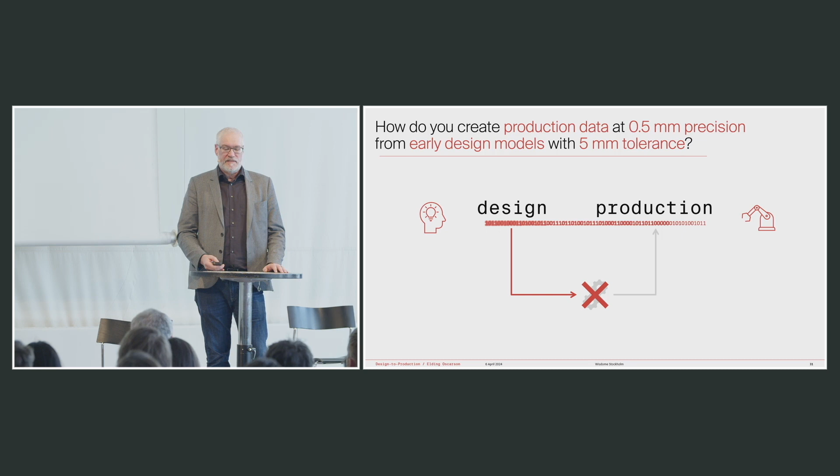But that gives you the sort of headache of how to turn an early design model with 5 millimeter tolerance into a crisp and sharp model with 5/10 of a millimeter tolerance. How do you do that? And this is where technology doesn't really help us yet. So the trick where you push a button and then the blurry image gets sharper, like at CSI Miami, where you can then read the number plate, it's just not really working. It's cinema. So we have to come up with different things there.

And the last and the most important thing from our point of view is architecture is made of joints. If you have parts that need to come together, you need to think about the joints. And if you want to do that parametrically, you have to have a really systematic approach, because you cannot allow yourself to forget any of those joints in there. So all the parts are individual, but they need to follow the same rules.

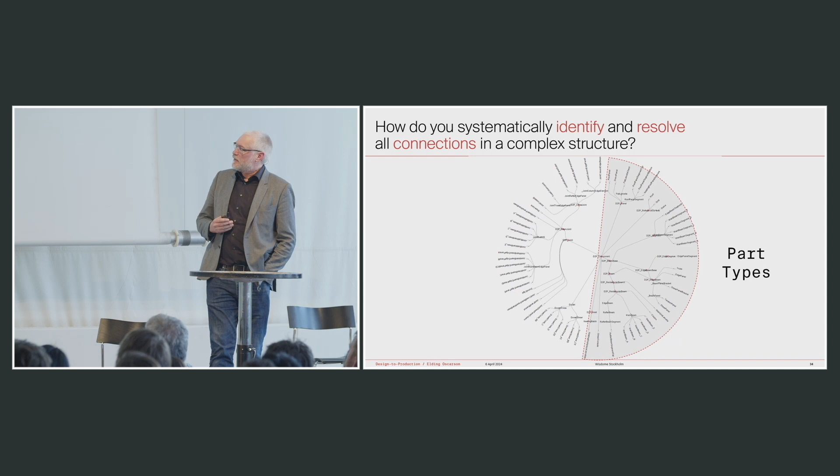And we have all the part types here in our digital model, in our parametrics, and the same amount of joint types on the other side. So we need to stop talking about parts all the time. We need to start talking about joints also. So how do we do it? Quickly, because I'm over time already, I realize.

And the very last slide, you have to have a parametric or systematic way of dealing with details. What we do is actually we're looking at all the components that are in the building, and we're making a matrix and say, hey, who's colliding with whom? And this is not bad. Collisions are fine, because where a collision is, there needs to be a joint. So from there, we create a joint list.

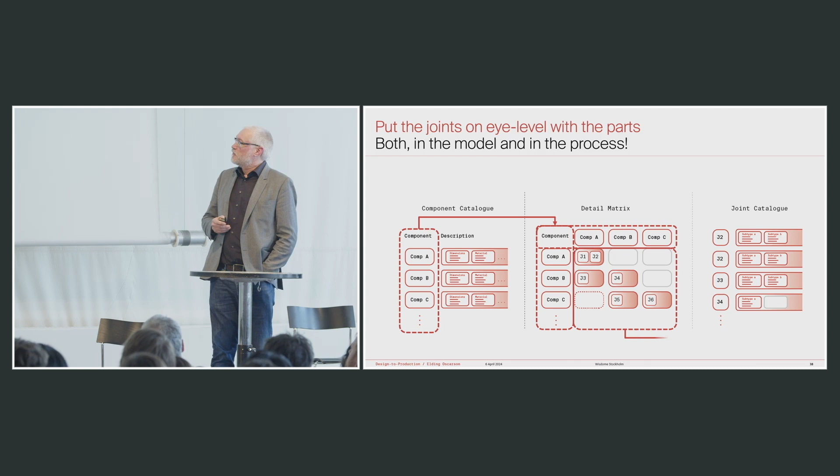And this is surprisingly something that's not really happening systematically in building up to now, and not in BIM at all, because BIM models don't even know joints. They just know parts. And that, from our point, is the important message that we would like to discuss with you: we need to talk about interfaces and joints, both in the models and in the processes.